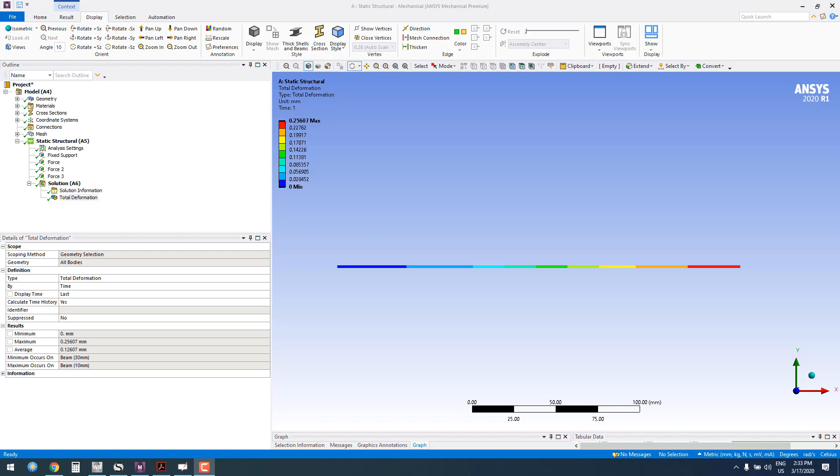In this session, before going to view the results, we will see how by hand calculation we can solve the existing problem. So let's discuss about that. This is our problem, and we have cut the full problem into 3 sections. This cut is to establish the internal forces at those locations.

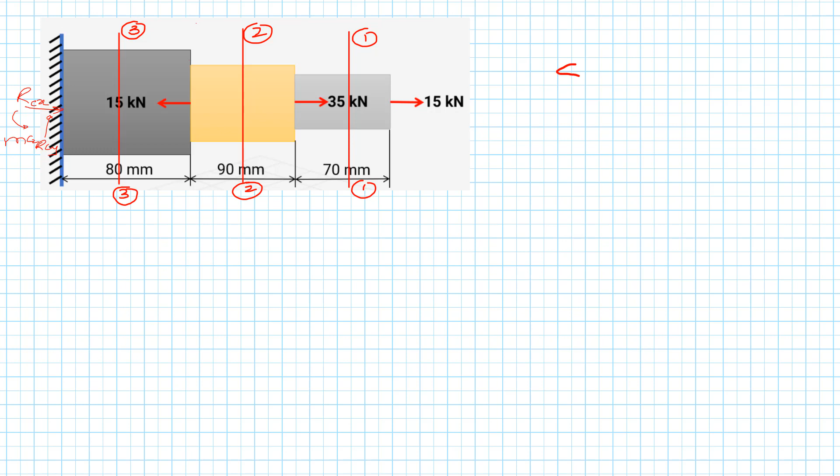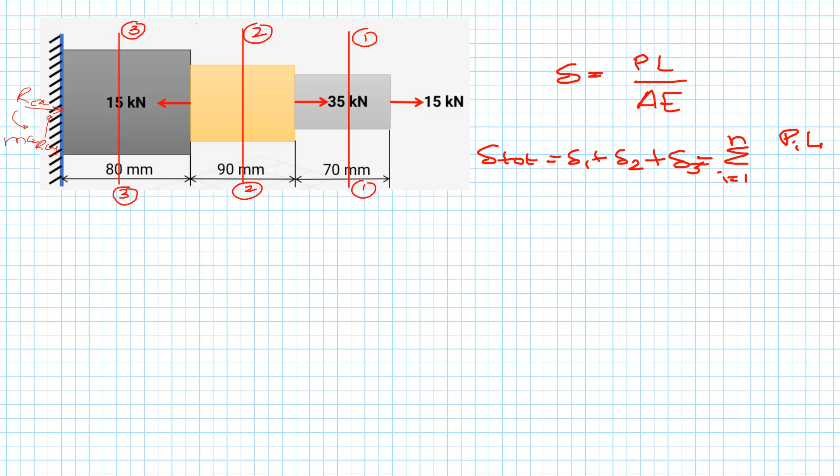Deformation delta is equal to PL upon AE, that we have discussed in last sessions. So the total deformation we can write down like this: delta 1 plus delta 2 plus delta 3. We have 3 sections, which is equal to summation of all the deltas from i equals 1 to n, which is equal to Pi Li upon Ai Ei, where Pi is the internal force.

So this is cut section 1, and applied force is 15 kilonewtons. So internal force P1 will be equal to 15 kilonewtons in tension. This is cut section 2. Applied force is 15 kilonewtons here and 35 kilonewtons here. That will give our internal force here, P2. So P2 will be equal to plus 35 plus 15, which will be equal to 50 kilonewtons in tension.

This is cut section 3. Here we have 15 kilonewtons, 35 kilonewtons, and again 15 kilonewtons here in compression, which will give internal force P3, and P3 will be equal to plus 15 plus 35 minus 15, right? So minus is for compression and plus is for tension. 15 and minus 15 get cancelled, giving 35 kilonewtons in tension. So these are the internal forces or actual forces in the cross sections.

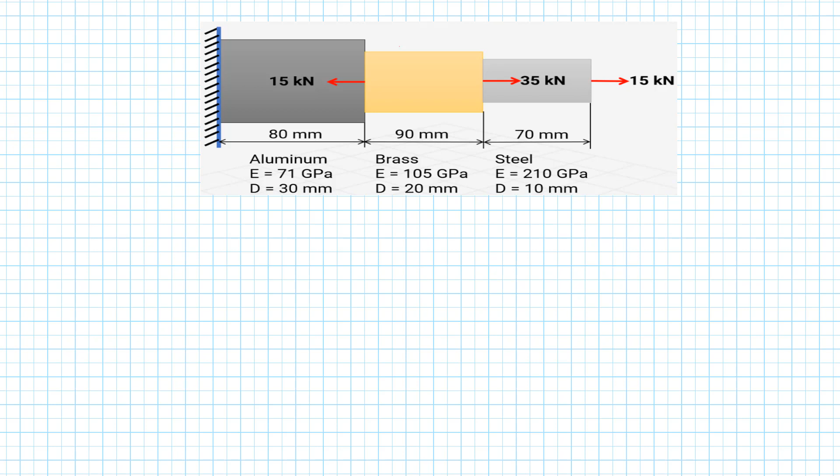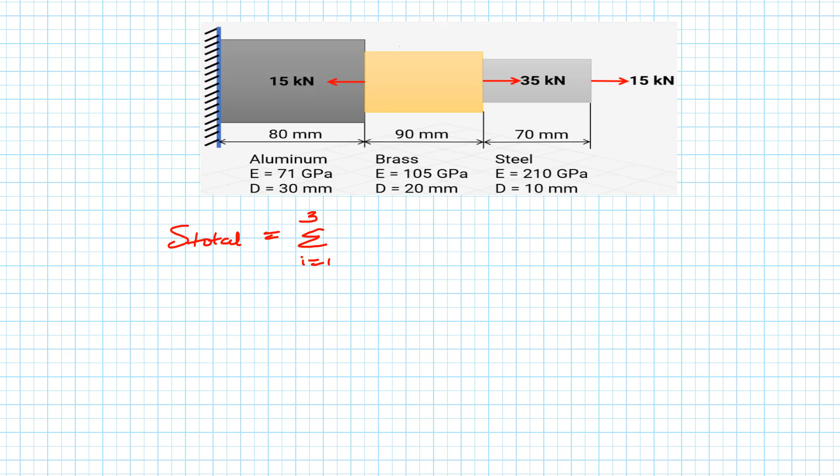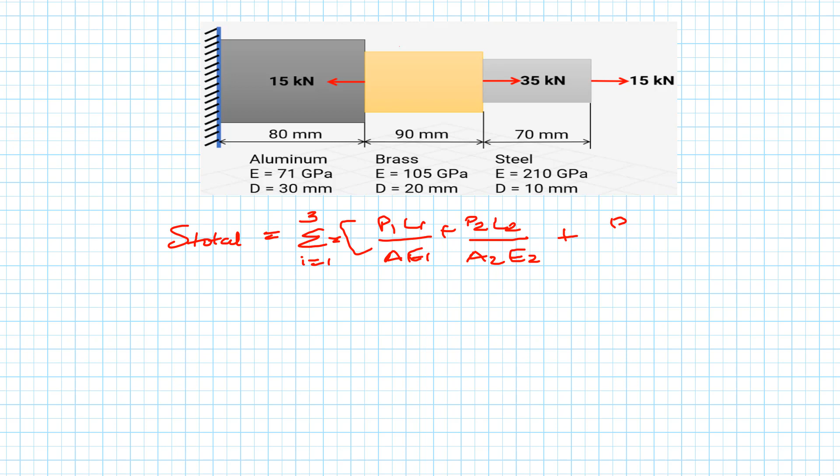So let's find out the first primary variable, which is deformation. So total deformation is equal to summation from i equals 1 to 3, which will be equal to P1L1 upon A1E1 plus P2L2 upon A2E2 plus P3L3 upon A3E3. So this is the first section, this is the second section, and this is aluminum, the third section. So let's find out deformation in the first section.

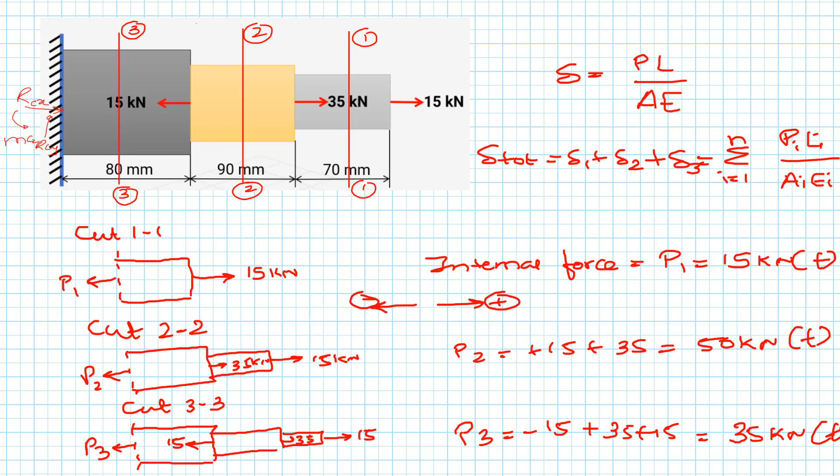So the force in the first section is 15 kilonewtons, 15,000 into L1, which is 70, upon area pi by 4 into 10 square into Young's modulus of steel, that's 2 into 10 raised to 5, that's 2 lakh. For the second section, the force is 50 kilonewtons, so it will be 50,000. L2 is 90 mm, right, upon A2, the cross section area of brass, into brass Young's modulus.

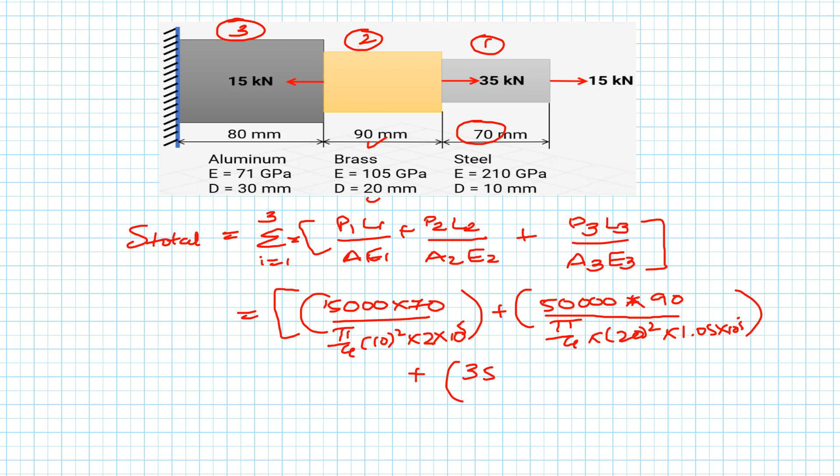And for the third section, the internal force is equal to 35 kilonewtons. 35,000 into length of the aluminum section, which is 80, upon pi by 4 into diameter 30 square into Young's modulus of aluminum, that's 71,000. So we'll get a deformation for each section. So it's 0.0637 for this, plus 0.1364 for the brass one, and 0.0558, which will be in total 0.256 mm. So we got the deformation U.

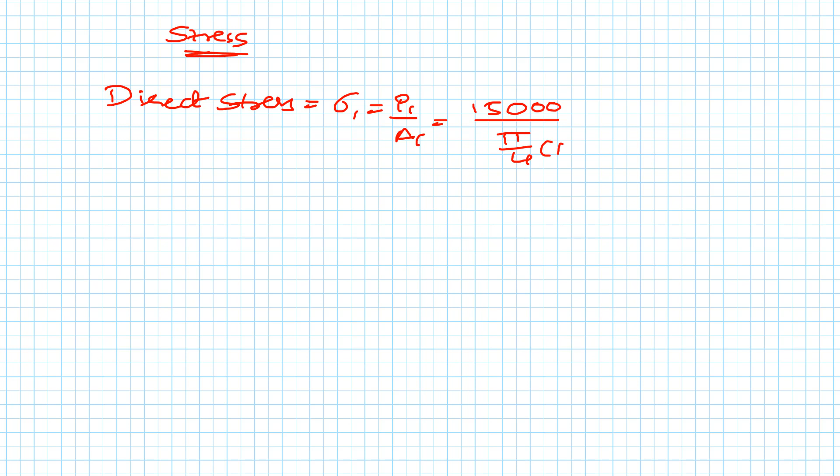Now next let's check out the stresses. For the stresses, we know by using strength of material equations, direct stress sigma 1 equals P1 by A1. The first one is 15,000 for steel, and area is pi by 4 d square, which gives the answer of 190.98 Newton per mm square. As you know, Newton per mm square is equal to megapascal, right? So 190.98 megapascal.

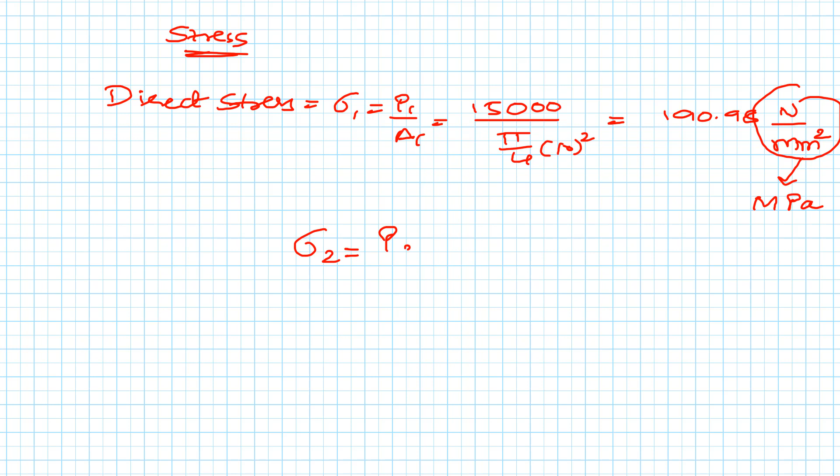Sigma 2 is P2 by A2. So second section force is 50,000 newtons divided by area of brass, with diameter 20 square, which gives me 159.1 Newton per mm square. Then the third section is of aluminium, which has the internal force of 35,000 newtons divided by cross section area with 30 square. So that gives me 49.5 Newton per mm square.

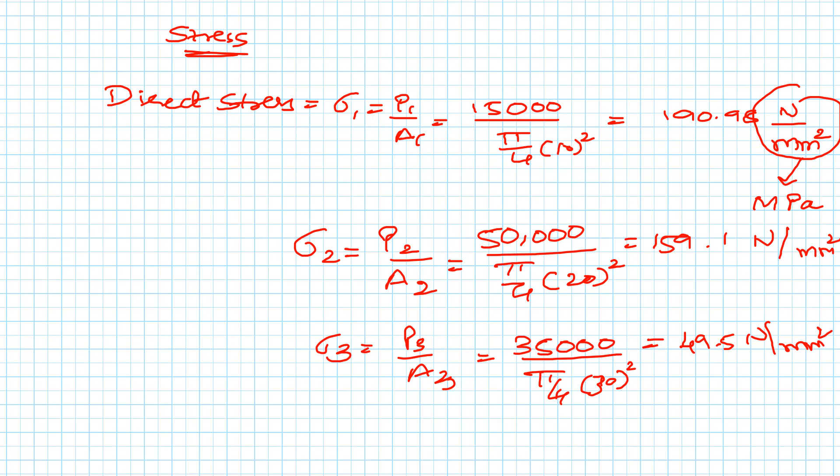So we got the internal forces 15, 50, 35 kilonewtons. We got the total deformation of 0.2560 mm, and then we got the stresses also for each cross section. Now let's do the last part, a reaction check. So the reaction will be plus 15 plus 35 minus 15, that is equal to 35,000 force, which will give a reaction of minus 35 kilonewtons.

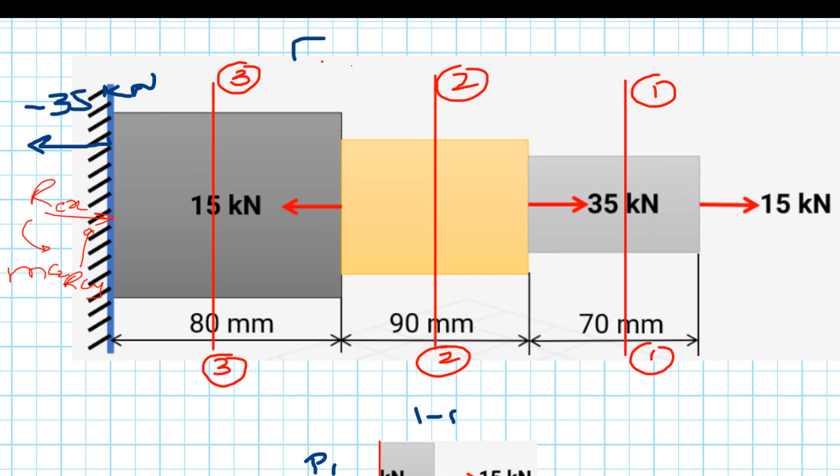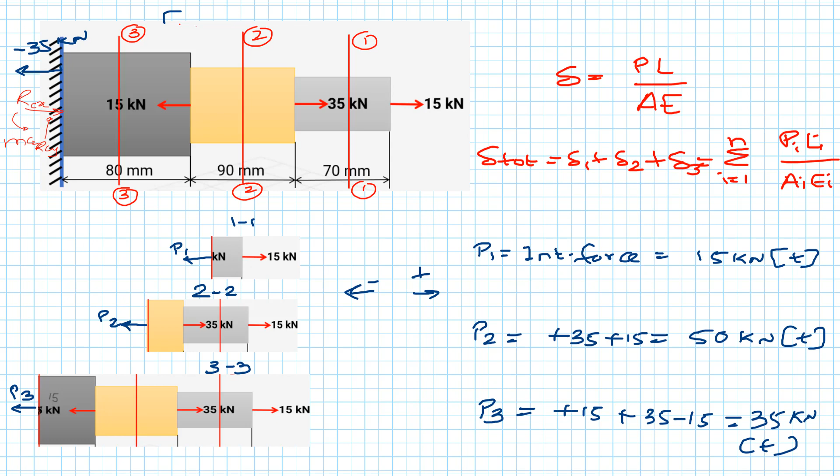Right? So according to Newton's third law, every action has an equal and opposite reaction. We'll not get a moment, we don't have any lateral force, and we'll not get any RCY reaction because we don't have any vertical force here. It's only axial force, so only the axial reaction RCX we'll get here. So that's all in the hand calculation part. Now let's check that in the answers in the next session.